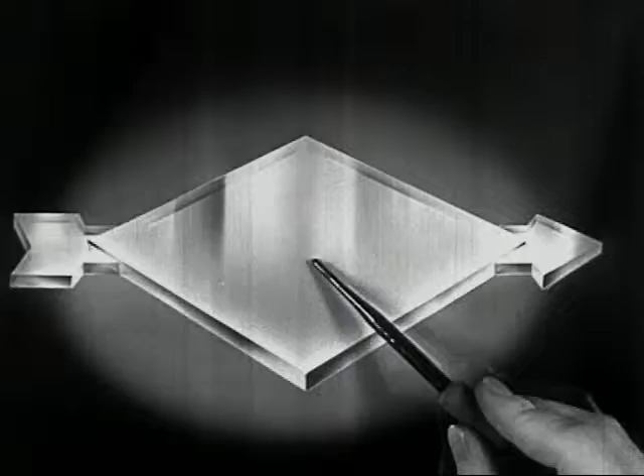The flash of power, the gleam of oil. In the sky, the power of oil conquering the heights. On the sea, the might of petroleum pulsing in great engines of the liners that traverse the deep. On land, oil feeds the fiery furnace or drives the diesel engines along far-flung rails of steel. And on the open road, well, you know what makes your auto run.

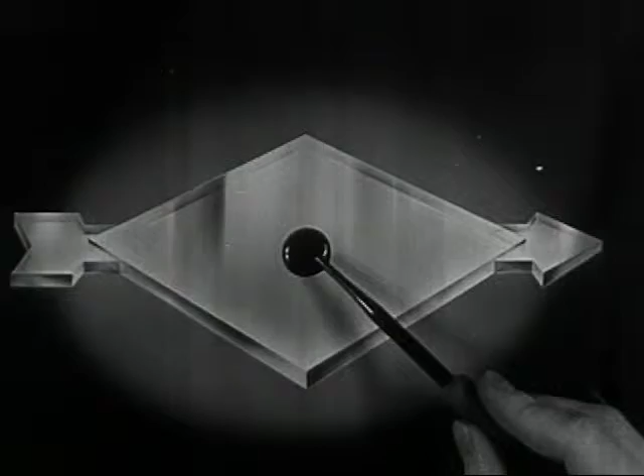For millions of years, this source of power slept peacefully in the dark recesses of the earth until modern magic loosed the liquid energy from its subterranean prison. Great areas became forests of towering derricks.

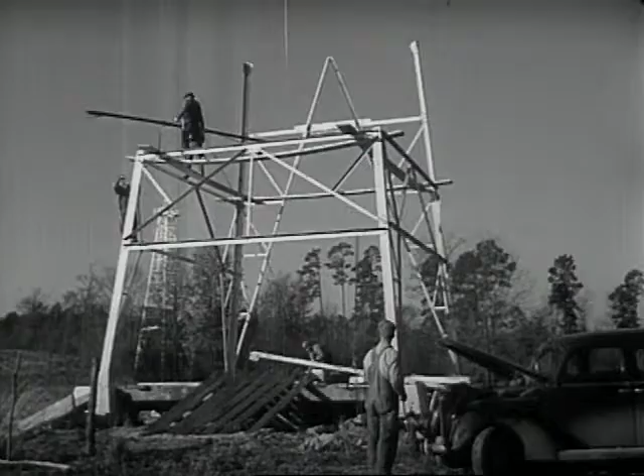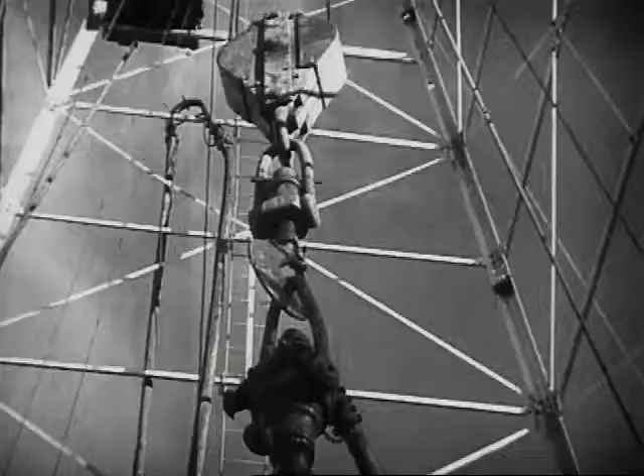And here's how the petroleum forest grows. A cellar is dug, and a rotary table to turn the drilling stem and the bit is set in place. Round and round the rotary goes, drilling deep down to oil. A steam engine drives the drilling mechanism.

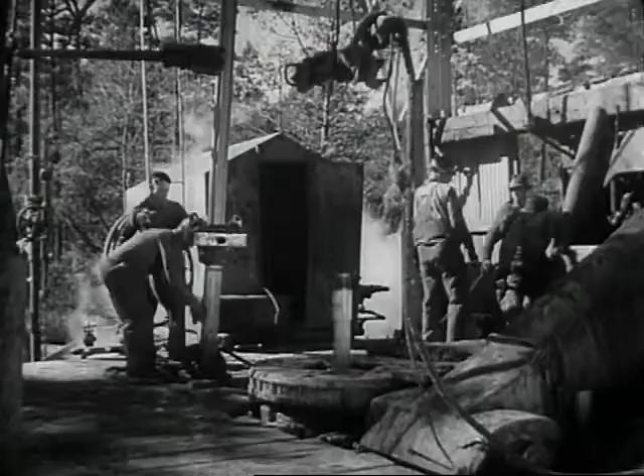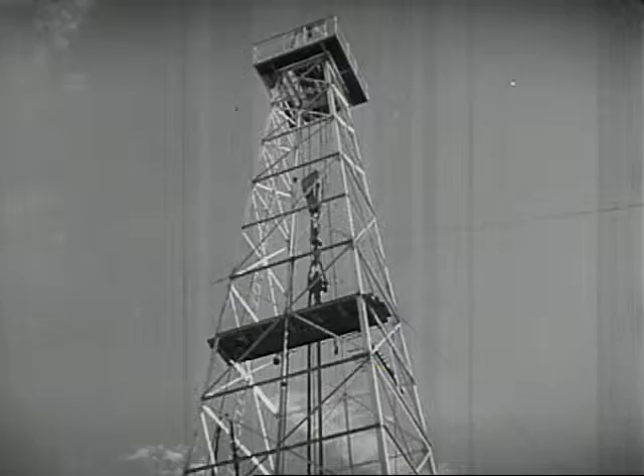They're inserting a length of pipe, lengthening out the stem for deeper drilling. A new joint is waiting. Oil field workers are called drillers, roughnecks, roustabouts, rope chokers. The oil field treats our ears to odd and colorful names. Now the drilling stem has been lengthened, then round and round once more.

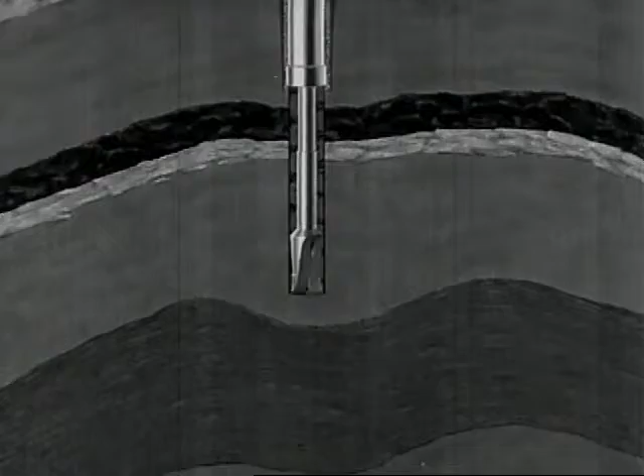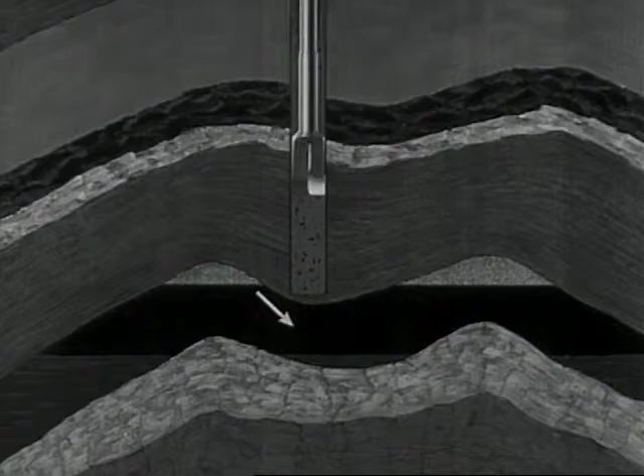Down through layers of sandstone, shale, limestone, down to astonishing depths. This well 5,000 feet. Some 10,000, 2 miles into the earth. And then, after weeks of drilling, fighting against natural obstacles, the drill at last reaches the oil sand, porous rock, which holds the oil much as a sponge holds water.

Next, the casing is lowered to the bottom of the hole and cemented in position. Then drilled through the oil sand, and a screen is installed at the base of the casing. The screen extends down into the oil sand. The oil flows through the screen, up through the small pipe tubing to the surface.

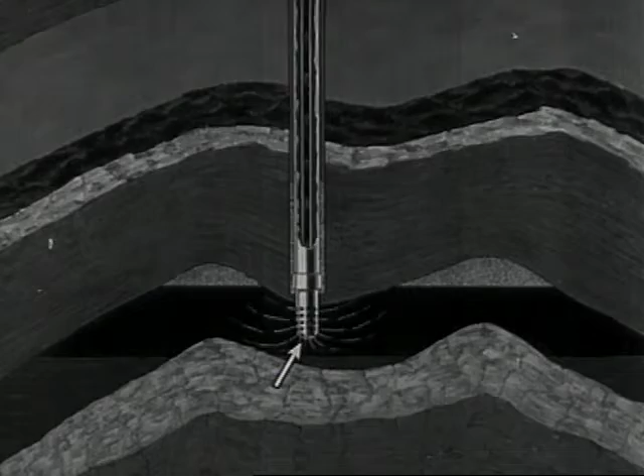So they've struck oil, and now the well must be cleaned of the mixture of drill mud and oil. Some wells flow of their own pressure. Others must be pumped, need power.

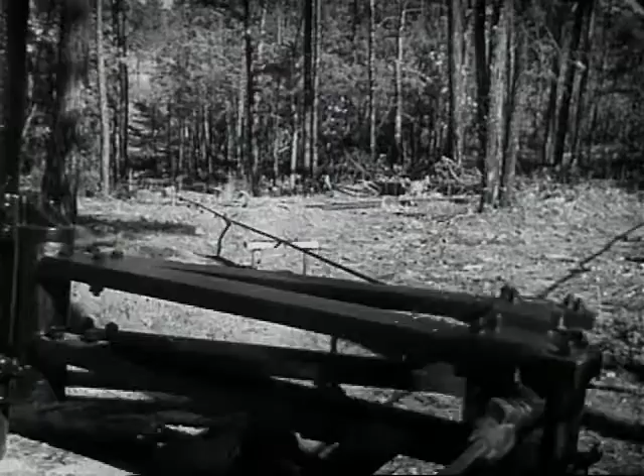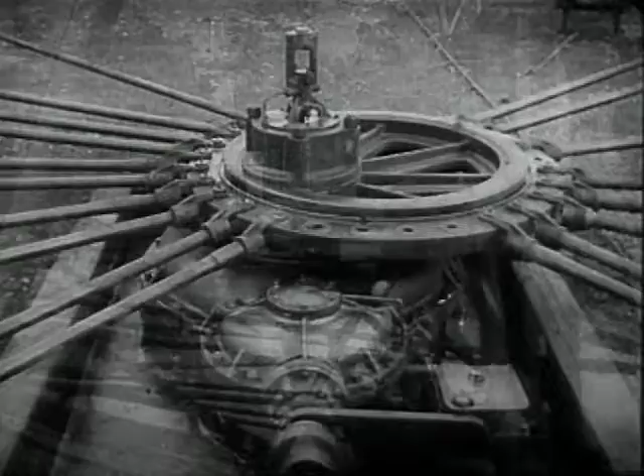The power is transmitted to groups of wells, the ever-swaying rocker arm, the rhythm of pumping, the unceasing heartbeat of the oil fields. A 24-well hookup is the height of oil field power, pumping black magic from 24 drillings in the earth, all at the same time, out of the ground.

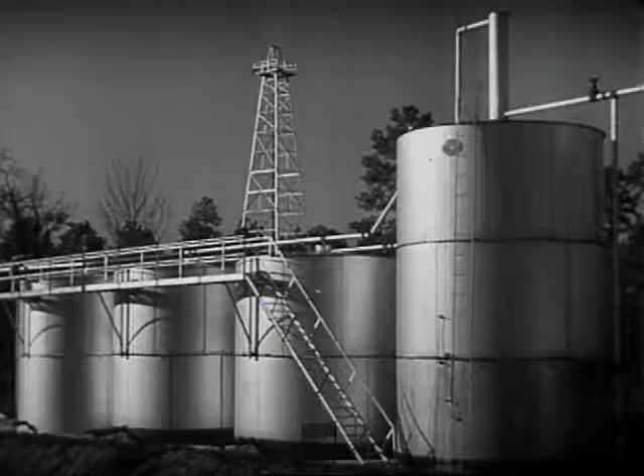The oil is cleaned of natural gas or water, which is combined with it. Next, the petroleum starts on its way through a great network of pipelines. There are powerful pumping stations every 40 or 50 miles to keep it moving along the lines.

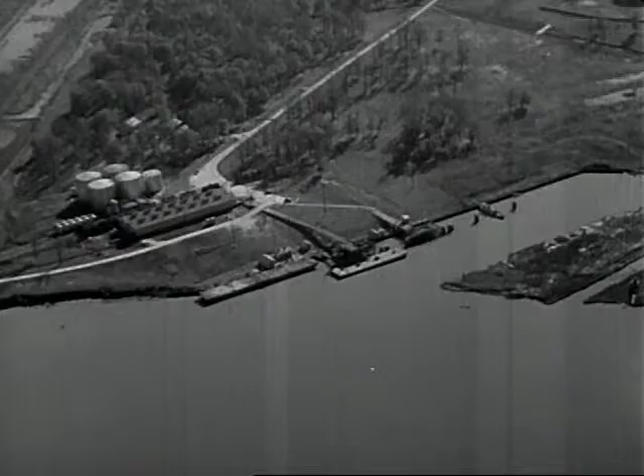The lines of pipe, alive with racing oil, run through forests and over plains to these silver discs. They're storage tanks where the oil rests briefly before it rides the waves in giant tankers. And they're masterpieces of shipbuilding, those tankers of steel. The largest navigate the sea at 15 knots and carry 5.5 million gallons of oil.

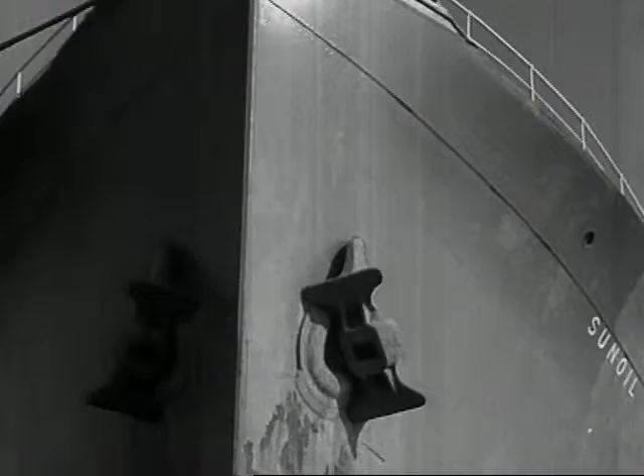The voyage of oil to the refineries. The refinery with its modern structures, technological towers, minarets of science, docks, office buildings, pageant of industry. Day after day, there is an endless flow of oil as the tankers discharge their liquid cargo.

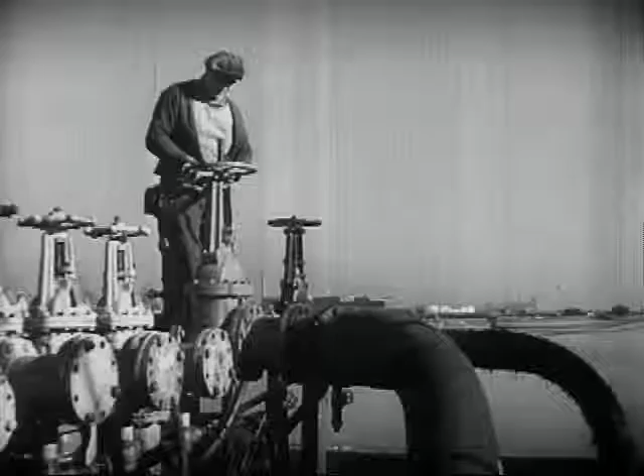Unloading oil is a vast operation of piping through huge hoses. Discharge pipes on the vessel and receiving lines on the dock are connected, and a cargo of 5 million gallons is discharged in less than 24 hours.

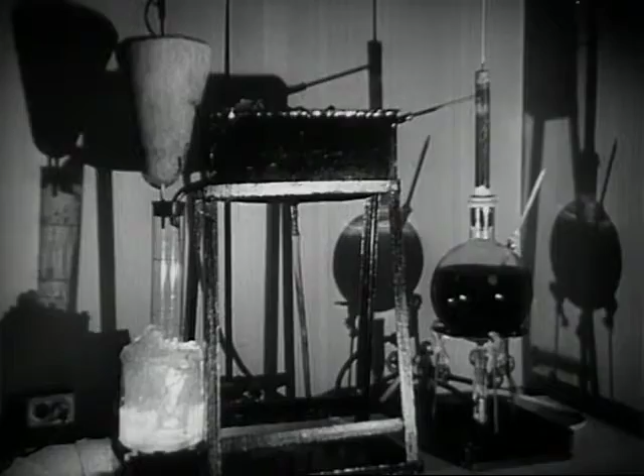No two cargoes of crude oil are alike, so each boatload must be stored in different tanks, and each batch must be processed individually, with laboratory tests to indicate the precise treatment for each.

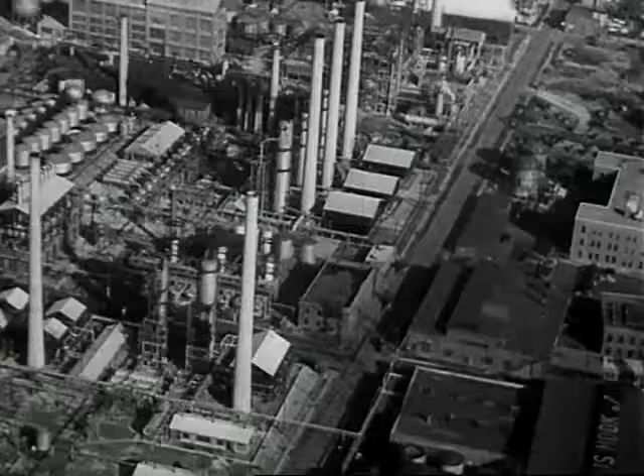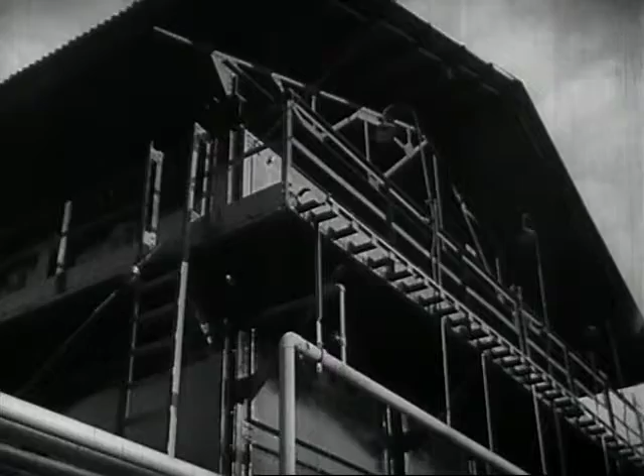That is embodied science. Those masses of strangely wrought steel, forests of stacks, glowering and hissing boilers, leaping and winking fireboxes. Intense heat, the flames roar in the furnace, yet the oil flows so fast the heat does not scorch it. And scientists wrest from the crude petroleum its tremendous power in the form of gasoline and other fuel oils.

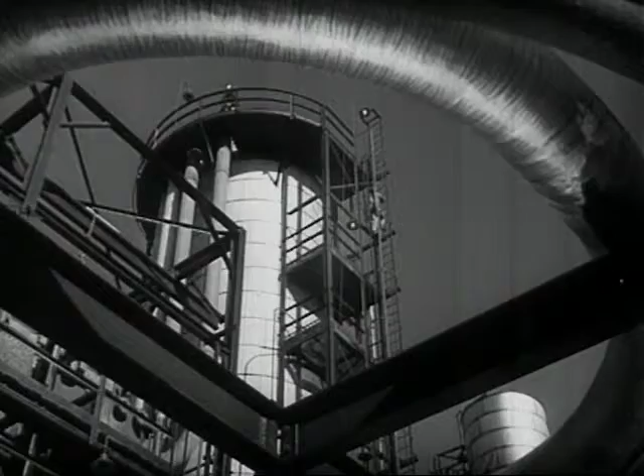And that's done in these towers called fractionating towers. They divide crude oil into the lighter and heavier parts. Those of different boiling points liquefy at different levels in the towers. Some lighter than gasoline liquefy at the top. Heavier parts liquefy further down. At the bottom are the heavy fuel oils, or the raw materials from which lubricating oils are made.

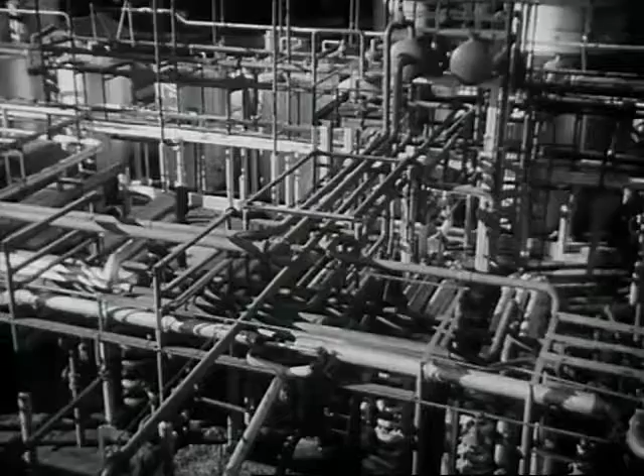When increasing use of motor cars pyramided the demand for gasoline to extraordinary heights, scientists were called upon to devise new methods. How could a greater proportion of gasoline be extracted from the crude oil than that obtained from the fractionating tower alone? To meet this challenge, the scientists turned to products other than gasoline which are drawn from the crude, studied their molecules, and found a way to change them, to turn them into gasoline.

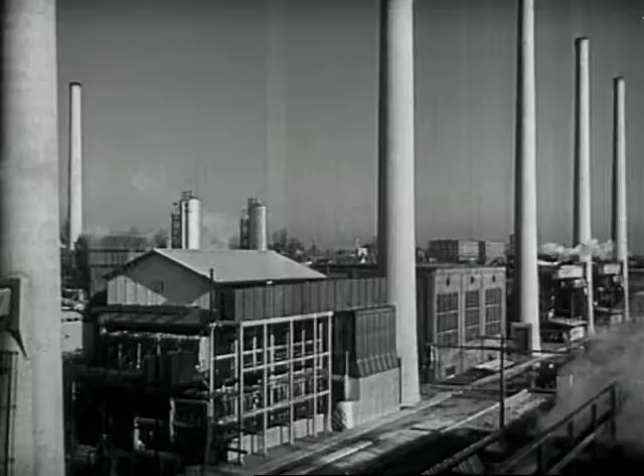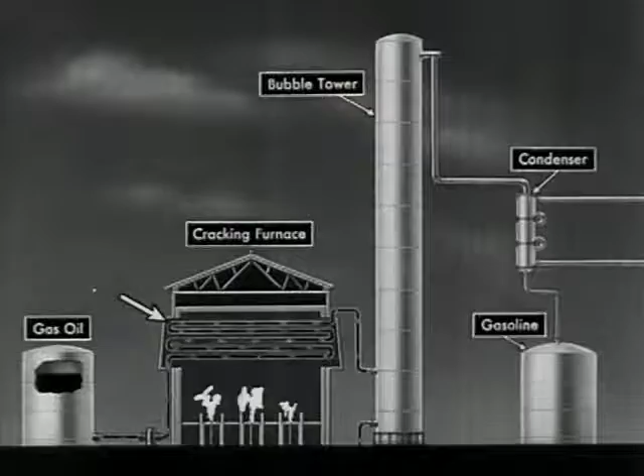The result was cracking. Let's look at a diagram of a cracking plant. Here we see how one part of petroleum that is not gasoline is converted into gasoline. Called gas oil, it is pumped through a pipe into a cracking furnace, heated to over 900 degrees under tremendous pressure. And the individual particles, molecules, are broken into smaller molecules, just as coal is broken under a hammer.

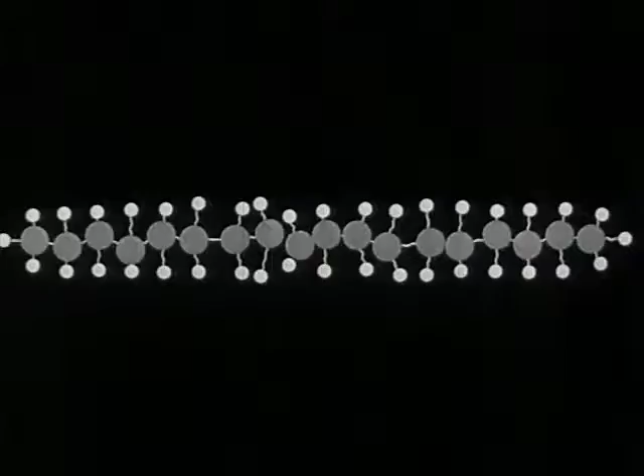If we could see one of those molecules, it would look something like this. The hotter the molecule gets, the faster it wiggles, until finally it wiggles so fast it flies apart. The pieces shoot around at great speeds. They eventually find partners and form new and smaller molecules that look something like this.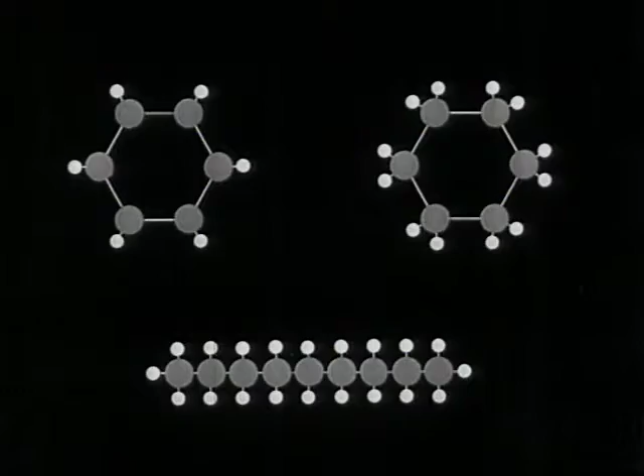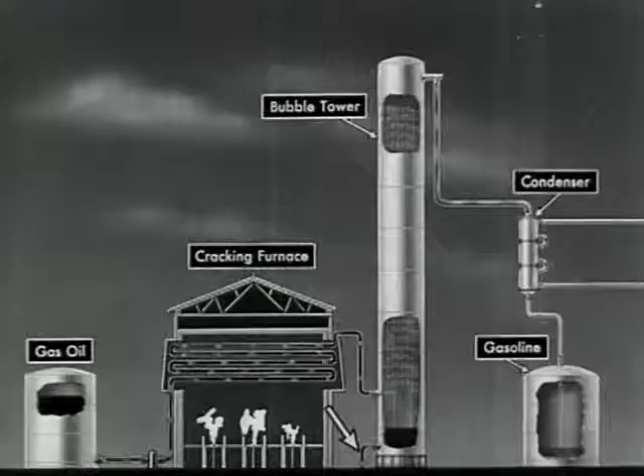These smaller molecules are now no longer gas oil, but are gasoline of high-powered, knockless quality. Some of the gas oil molecules do not fly apart and must be separated from the gasoline. This is done in the bubble tower. Here the big molecules, which are not gasoline, are held back and come out at the bottom as a liquid. The gasoline goes up the tower as a vapor, comes out at the top, and is condensed into liquid gasoline. Gasoline that gives more power to you.

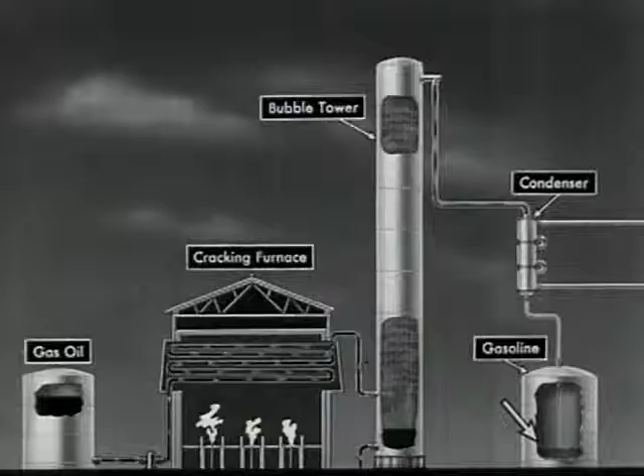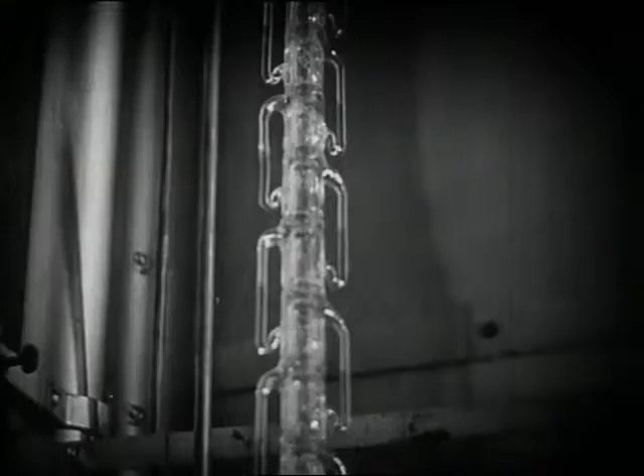Experiment is the key to it all, and this is the experimental laboratory. In the making of powerful motor fuel, the control of temperatures is of extreme importance, and it is measured to an accuracy of 1/100th part of 1 degree. Gasoline is broken down into over 200 parts in that elongated tallness of glass, and each individual part is studied.

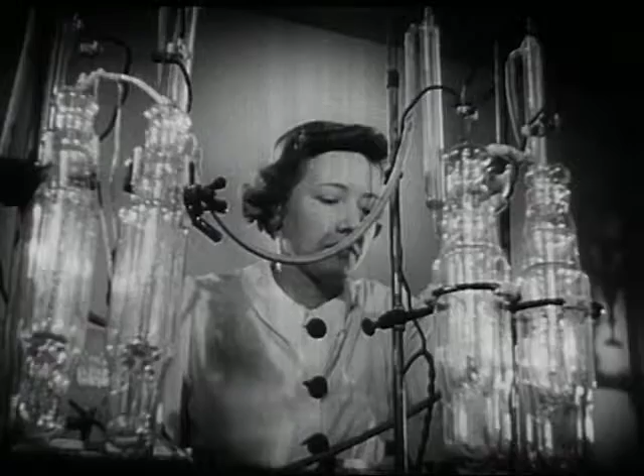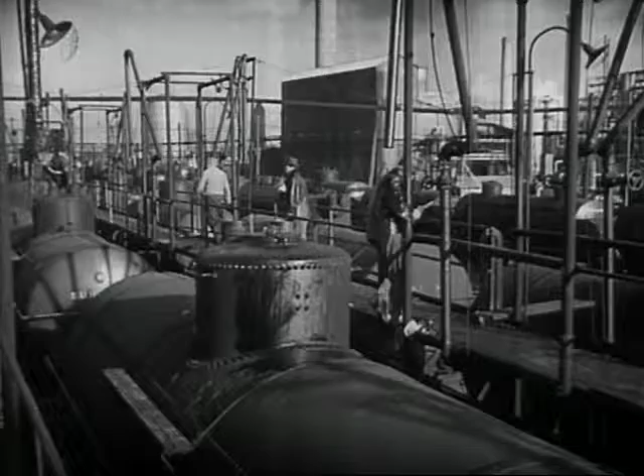The laboratory with its strange gleaming of new and unpredictable things. Here are created modern miracles with the chemistry of oil. Tank farm, to which the motor fuel goes from the refinery and then out to the nation by railroad tank car and by motor barge.

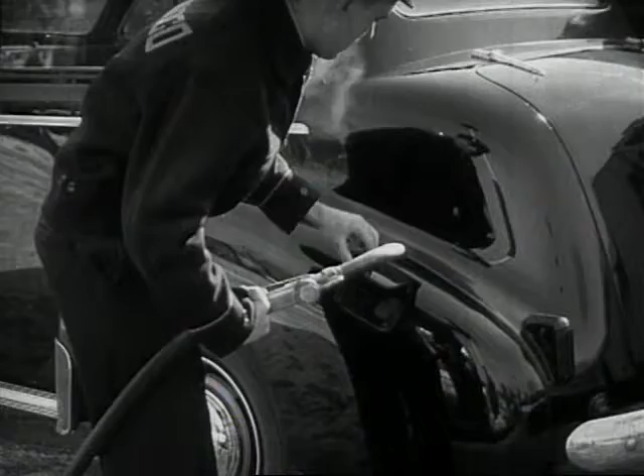Pipelines run their web-like nets under rivers, over mountains, carrying gasoline that goes into millions of gasoline tanks to generate billions of horsepower for the nation. Oil means horsepower in a horsepower-using world. Briefly, in 4 words, more power to you.